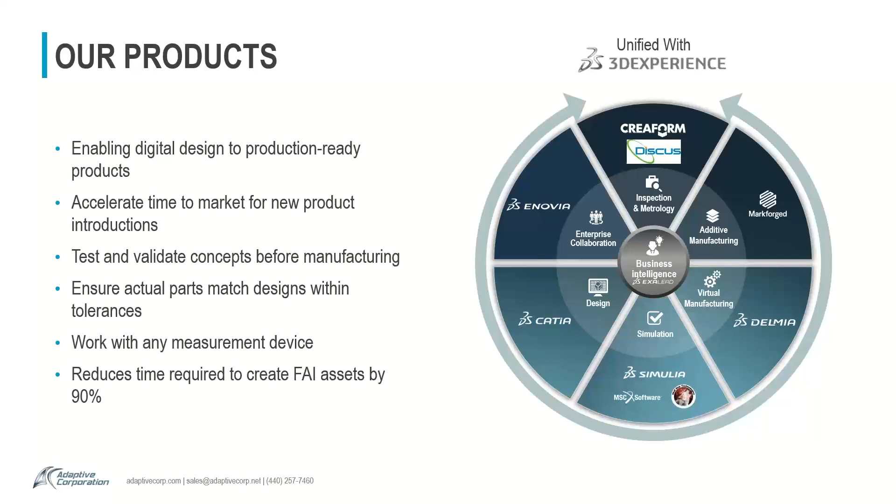So in terms of what that portfolio looks like, here's maybe a little bit different view of it. You'll notice that one of the components that we offer is something called CATIA. For those of you that are familiar with SolidWorks, CATIA is like the big brother version of SolidWorks. CATIA is used largely in the automotive and aerospace industry. And then there's a portfolio around CATIA and now SolidWorks as well for simulation and data management and factory simulation and automation type stuff. And we're involved in that as well.

As far as our customers, I mentioned that we have over 500 customers. Here's the obligatory slide that shows some of our marquee customers and some of the names. You probably recognize a few of those. Our customers, as I mentioned, include some large OEM, Tier 1, Tier 2. We work with a lot of small job shops as well, so it really kind of spans the gamut.

Adaptive specializes in providing portable metrology equipment. So what we're seeing here, these are solutions from a company called Creaform, who makes portable 3D scanners. They also provide portable CMMs, as well as automated or robot scanning and inspection equipment. Adaptive offers connectors between DISCUS and PolyWorks, for those of you familiar with PolyWorks. So it gives us the ability to take the as-measured data and automatically enter it into your PPAP or AS9102. So if you're interested in any of those details, please let us know.

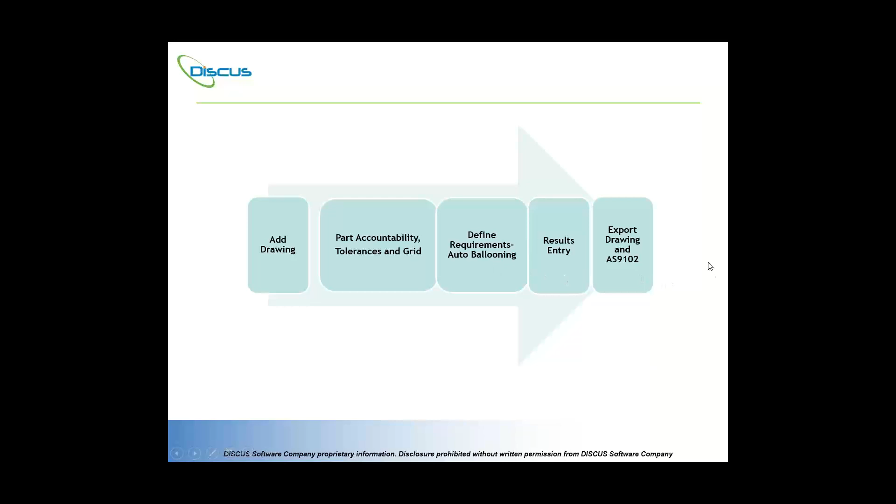So without further ado, we're going to add the drawing, work with part accountability, spend a lot of time on defining requirements, and then export. So let me now get into DISCUS. This is the welcome page.

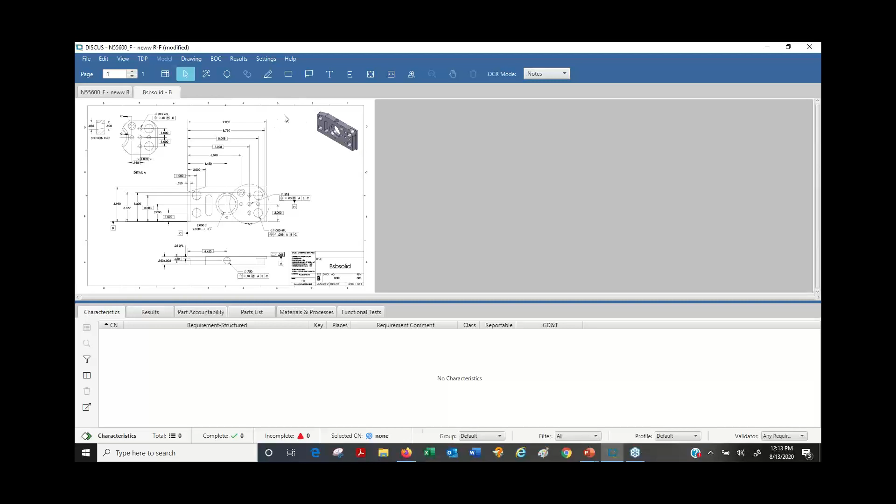Well, I know what you're thinking. I can read your minds. You don't often get prints this nice, I bet. I bet you don't. Well, sometimes you might get a print that has been, I say, a little bit compromised. And let me share with you a print that you'll probably recognize as being maybe scanned one too many times, an older print, very compromised. I know you've seen things like this, right?

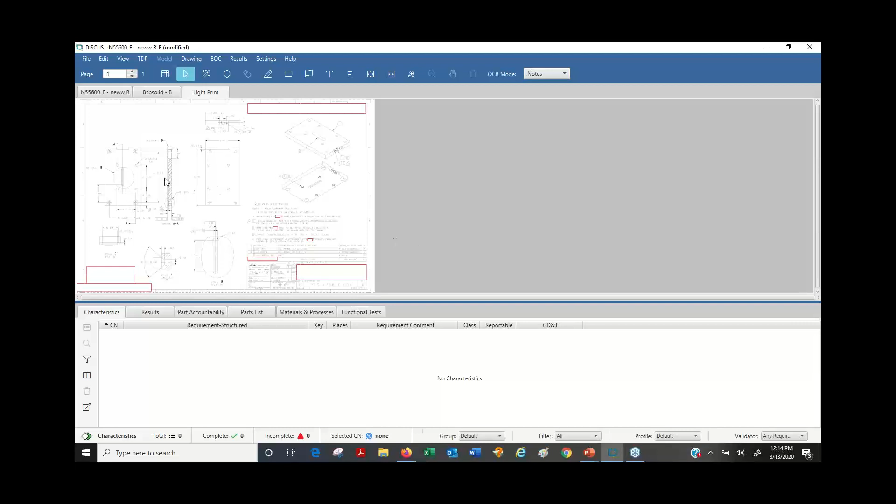Well, in DISCUS, we can improve that for our OCR. Under View, we can adjust the contrast to sharpen that drawing. Isn't that a lot better? Surely helps your eyes, and it facilitates the optical character recognition. Well, I have 3 prints. The File menu, my export will be here. View, you already saw I adjusted the contrast.

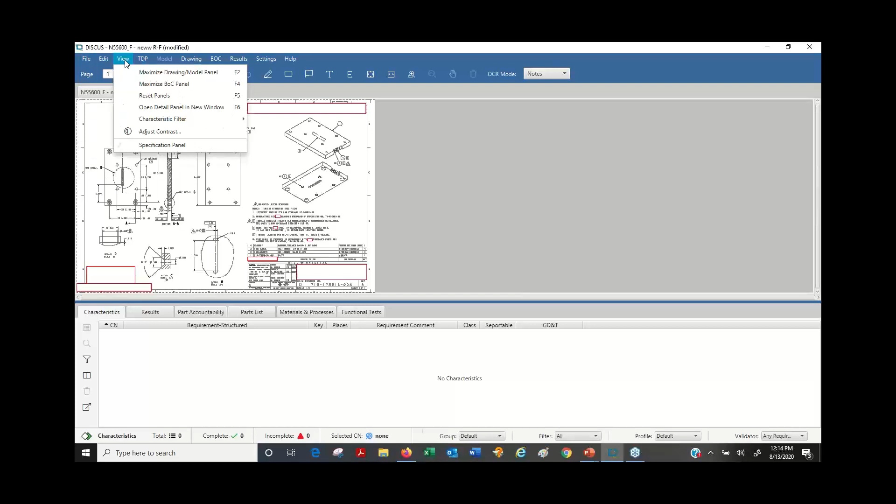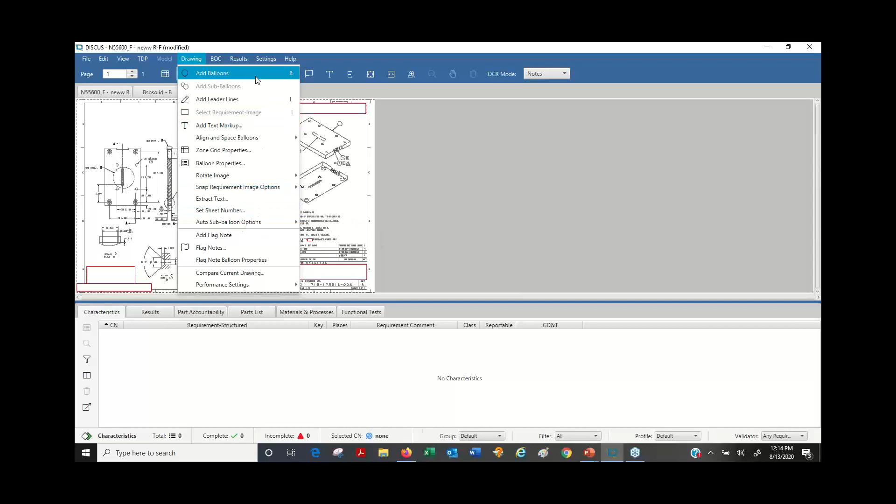And what I do here in drawing, I'm just going to go to some of the more important features, is we have an auto sub-balloon option. The auto sub-balloon option means if there's 4PL or 2X, it gives me that number of sub-balloons. I like to turn that on. Now the results will have our pass-fail data. I set it up and forget it. You can share the list with other people within your group so that you're all picking from the same list.

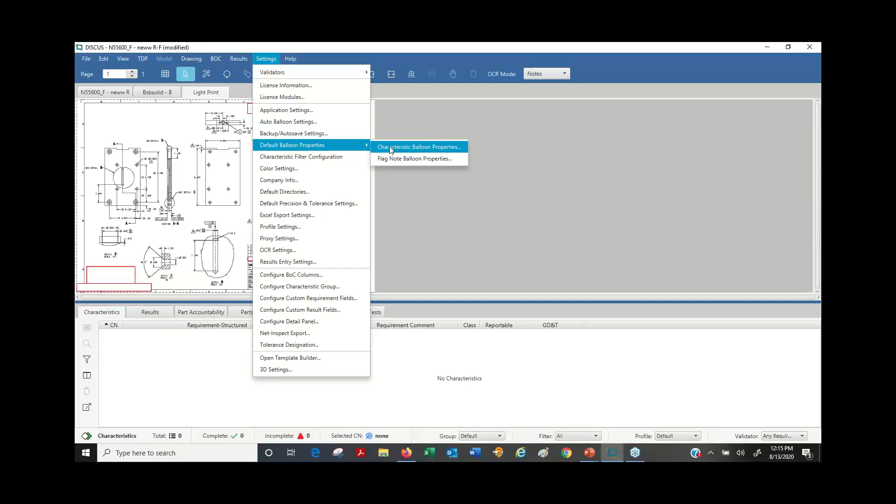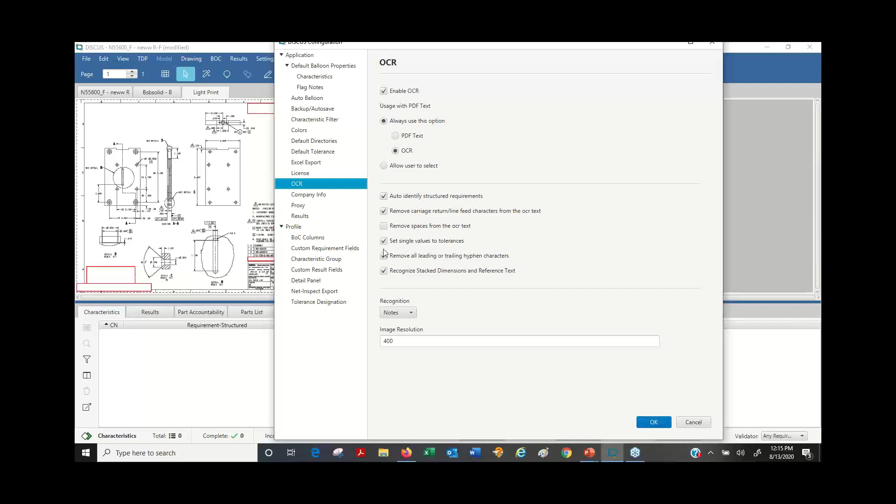Under Settings, we have our properties. So my size of the balloon. Also, I would like to make the balloon nice and thick so we can really show it off today. Additionally, we have default tolerances. I set it up per the drawing. You just click in the cell and change the value per the drawing, because with the OCR, the optical character recognition, one of the toggles is to set the single values to tolerances. You'll see that rather dramatically within this. So that's basically, I set that up and I'm ready to go.

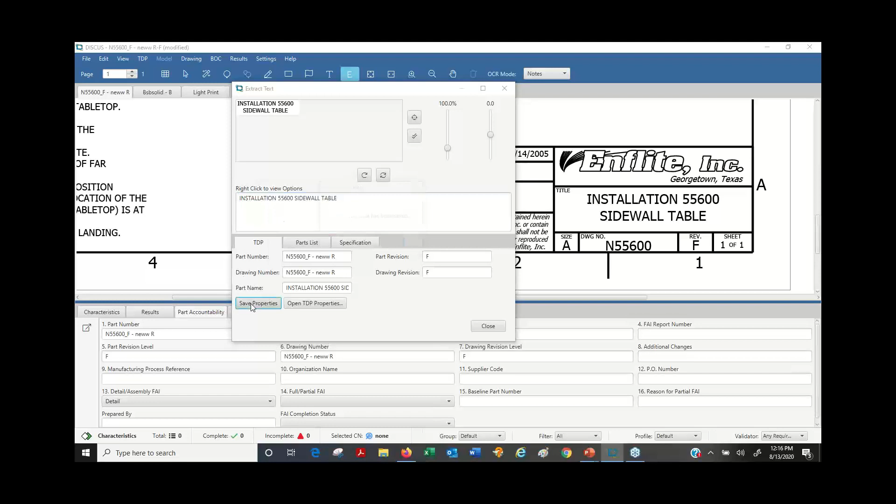I always like to focus on the part accountability first and to show you a little bit of the OCR. This is an extract text. And the reason I like this one is that it can pull from the name of my drawing. I don't even want to type that. This is what OCR does. I drag a rectangle, there it is, and right click, and that's my part name. Save the properties. Okay. And see, it supplied that information.

I'll say that Bill did this in your company, and I'm filling this in right now because this is going to be the title block. You complete this as much as seems reasonable, additional changes, etc. If you have a supplier code, it can be done at any time.

Now, those of you who are aerospace, you know that everything on the left 2 columns are going to be required by the AS9102 Revision B standard. The ones on the right are conditional. Intentionally, I'm going to leave number 9 open so you can see the ramifications when I miss something, because we are very adherent to the AS9102 standard. Those were my tolerances, and I put those in previously.

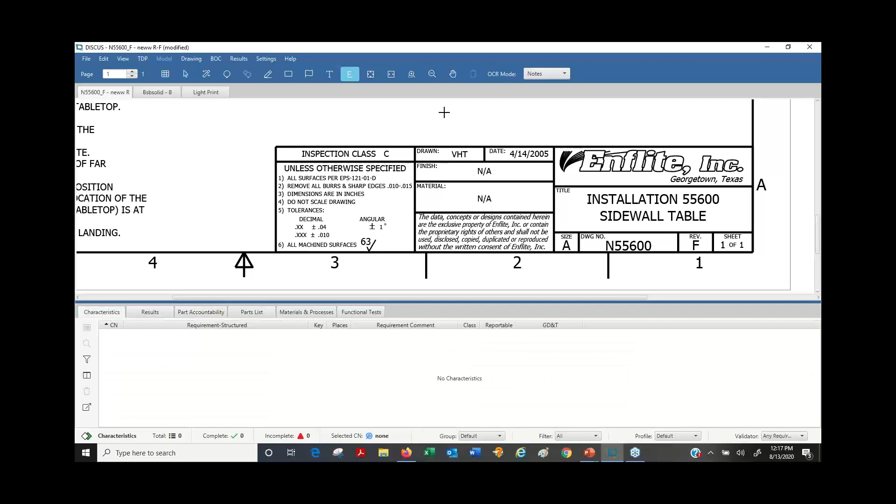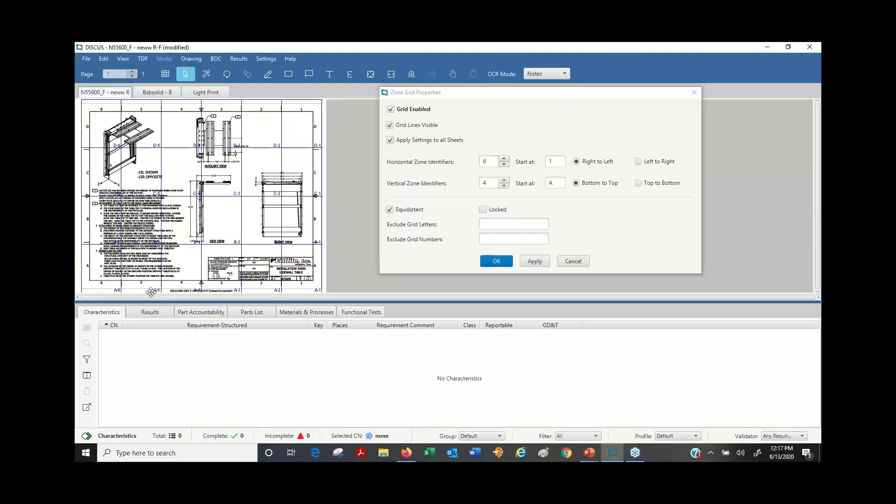What I want to do next, I'm going to put in some zone grids. That has always been a laborious process to ascertain the zone grids. This is 6x4 and click apply. The zone grids are laid. I simply move them. And when I balloon, the zone and grid data is going to be there automatically. I'll move that up a little bit. Looks good. Make them invisible.

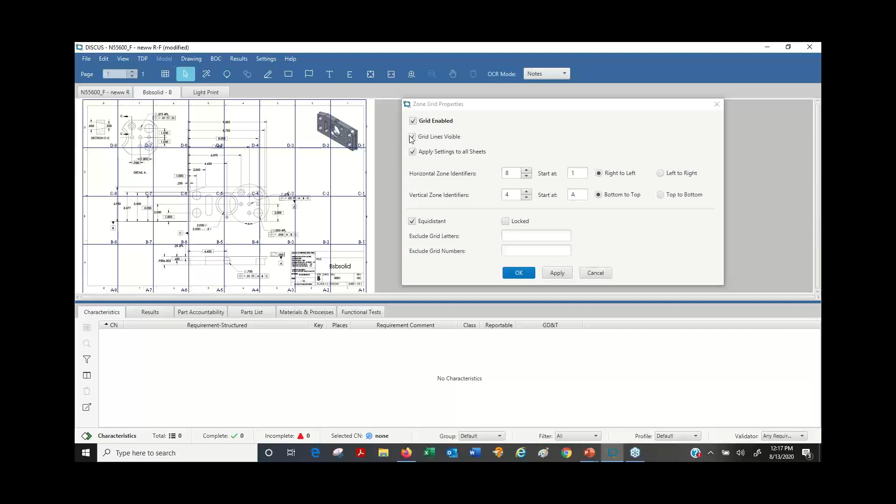Apply. You can apply the grid to multiple pages. Maybe your drawings have several pages. You can apply the grid across all of those pages and click apply. It becomes the same concept. I do all three of them just so that we have the same data as we look at the report later on. And one more, light print. There we go. Enable and 8x4. And apply, invisible, and apply.

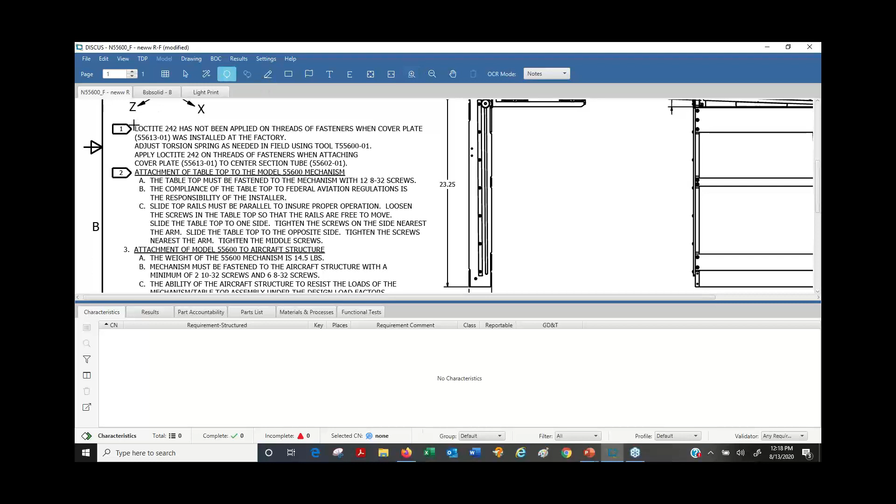So we have our zone grid, we have the title block information captured, and our tolerances. So we're ready to now balloon. Now, I'm going to balloon some notes. With my balloon icon, drag it around the data, and my balloon is red because it doesn't have any data in it, and I made it a nice bold balloon, and I let go.

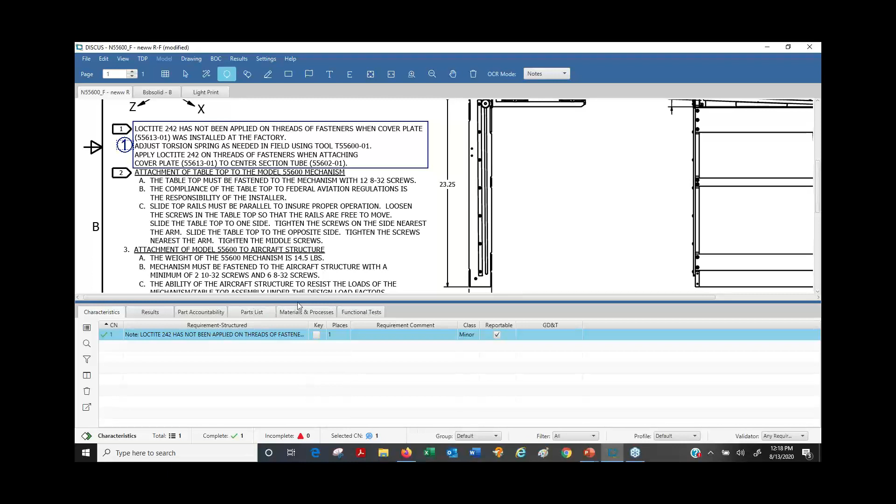And it supplies the information down the bill of characteristics. And you know, specifications are often called out on notes, aren't they? Well, let's assign that specification to Form 2. Let's do it. I'll just put it right here, a Loctite. Right click and add a spec. You can put the name of the spec down here.

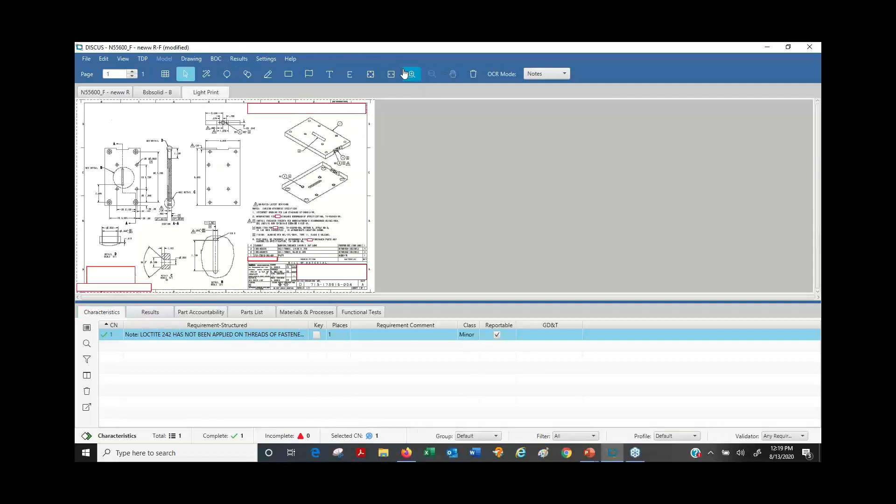I'm just going to be expedient right here. And you can put in your code and all that other information as you see fit. So that is a way to glean the specs right from the notes. Makes sense? I think that's rather important. I'm going to do it again. Whenever I have a training class or a demo, all my students say, boy, I'd like to see that again. So let's do it one more time.

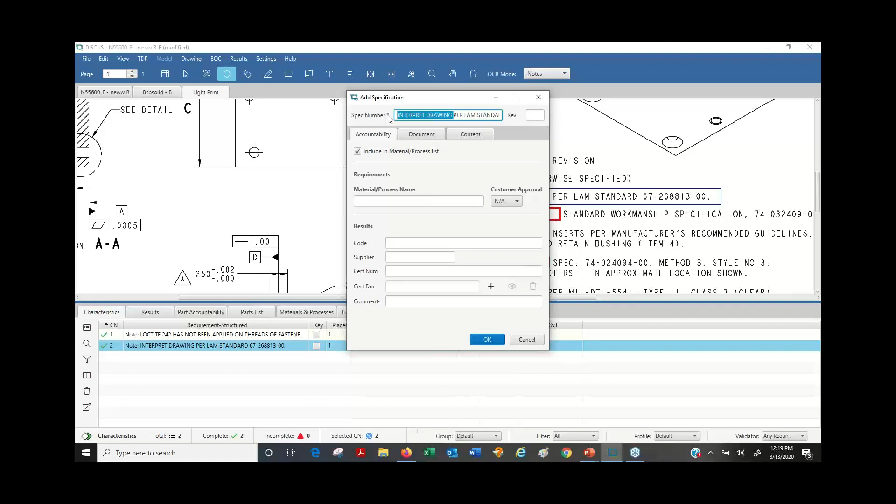Put it on this print. Notice my OCR mode is notes. Here we go. Per LAM standard, highlight, right click. We're already here, and I haven't done any typing, have I? And we are assigning that spec to Form 2. And simply submit it. There you go. So you can continue in that manner.

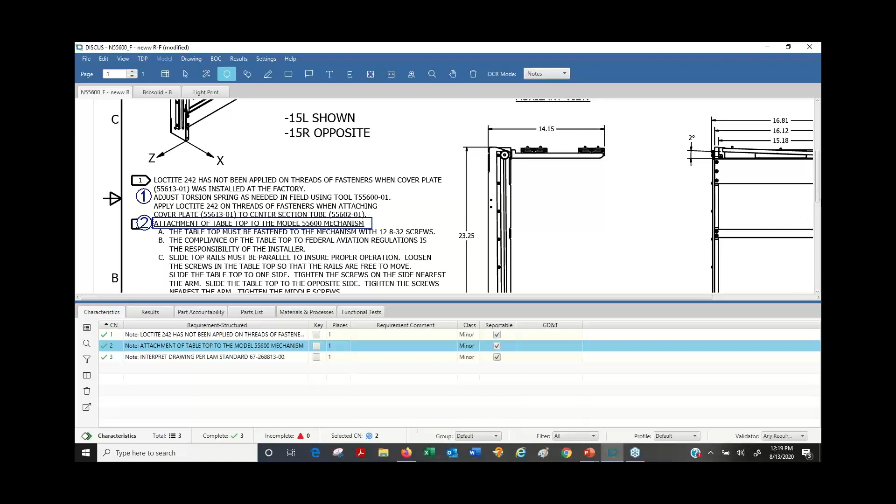Now I'm going to balloon this. Number 2. Let's do a few notes here. Now notice it's number 3, and I don't fancy it being number 3. In the bill of characteristics, I can pull it right up to number 2. Very easy to renumber it. My customer expects that each one of these notes A, B, and C are separate. So with 2 selected, I'm now going to subballoon them.

You know, just this will be a 2.1, 2.2, and you have to ask yourself, if you had to type this, how long would it take? And we are doing pretty well. Perfect. Very good. All right, you can move the balloons, of course, to position them. And, you know, this is another nice feature. You can put a leader line, you know, for really tight spots. You know how that works. And I made my leader line nice and thick as well so we can see it.

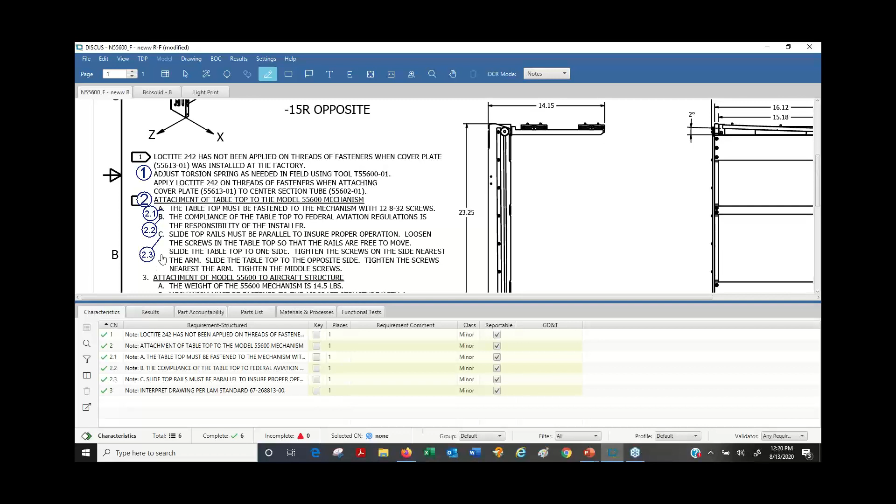Well, fine. Let me move up a little bit. I want to do a little bit more manual ballooning on this one. Just show you some ins and outs. Balloon this. And it gives me the upper and lower tolerances that I set up previously. DISCUS also has some intelligence with it, and for example, this 1.575 will know that it's typical. We continually refine DISCUS so that it becomes a tool to really expedite. One of the things I didn't do is GD&T. There you go. Make sure that's there.

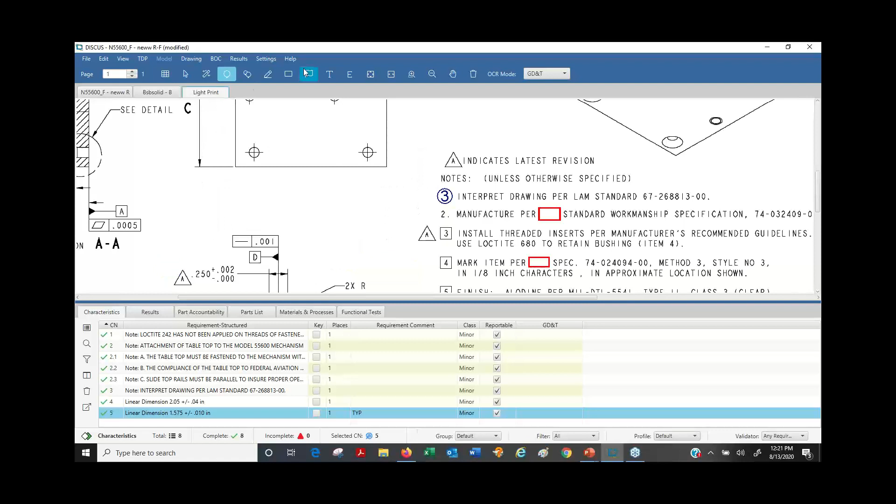All right. We've done a really good job on this, and we haven't had any trouble. But I do want to share with you this drawing because it's an older drawing. I'm going to show you some tricks of the trade here. I'll zoom in. We had to darken this, and actually the font is a little different, and this as well. So I'm going to balloon a few things here, then I'll show you some auto ballooning. I'm going to balloon this flatness because I know sometimes things don't work out real well.

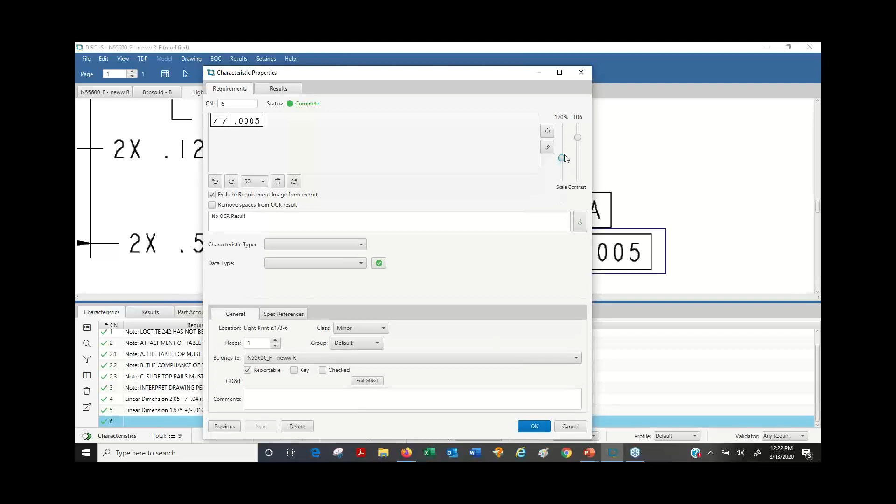Now, in the bill of characteristics, and I had my GD&T going, you may notice there's nothing here. My customers call this the brains of the OCR. It's the characteristic properties. And you see how wee tiny that is. Every drawing is as unique as a person. So sometimes you need to scale it up a little. Let's see if we get it. And maybe, oh, a little bit more maybe. There, that looks pretty good. So I'm going to set that scale and we're good.

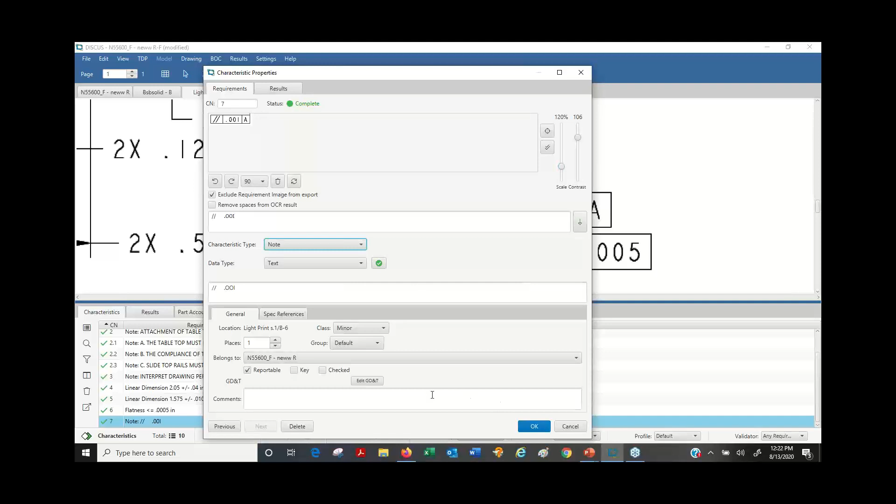Okay. And we'll try it with the parallelism as well and see if I have managed to have the right scale. Sometimes I'm lucky, sometimes not. Sometimes maybe I need to reduce that a little bit and then get the right scale. Let's see. Not quite. There is also a GD&T editor that you can use. And 001. And a 1. And this will be, I think, datum A. Here you go. I do want to keep that.

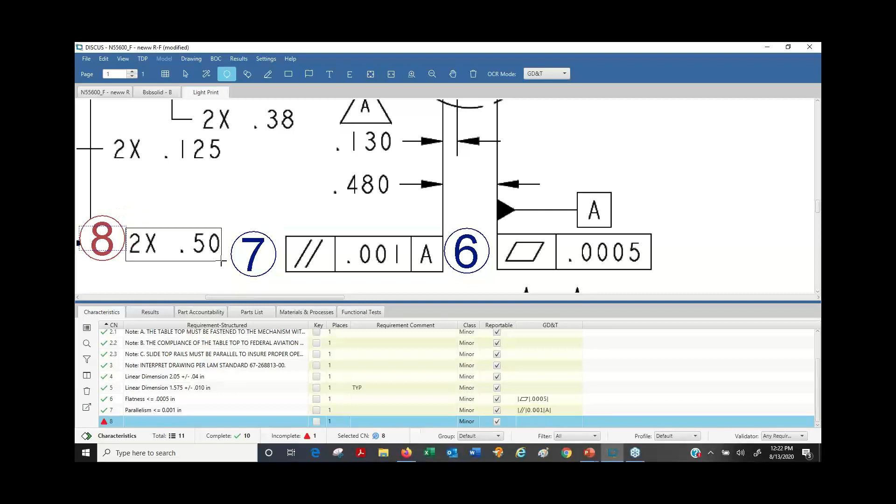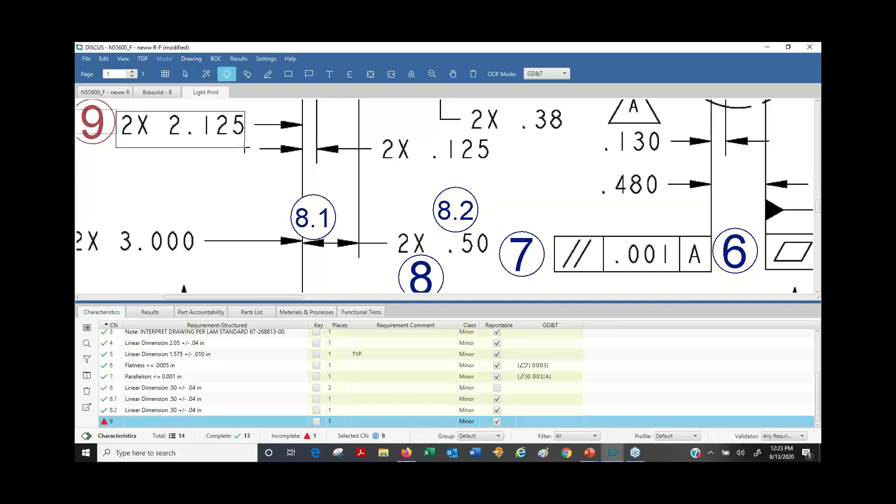Notice when I balloon this feature, it gives me the 2 sub-balloons, 1 and 2. So I can move that. Because it knew it was 2 places, the 8.1 and 8.2 will take the responsibility of the results. So that's a nice feature. Let's see that one more time. You may like that concept or may not. Some of your customers will want you to have that. Others, not so much. So you can turn it on or off. Most of my customers do appreciate having that kind of granularity. There you go. So there we had a little bit of manual ballooning of this.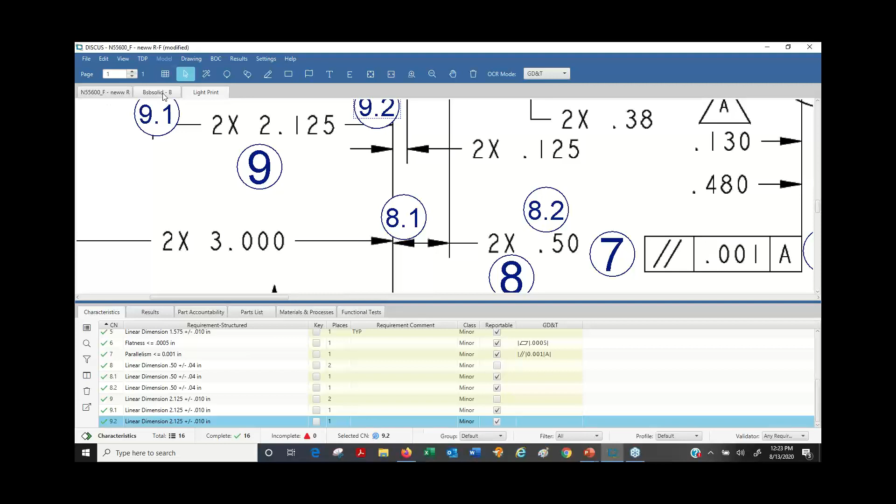Now let's look at auto ballooning.

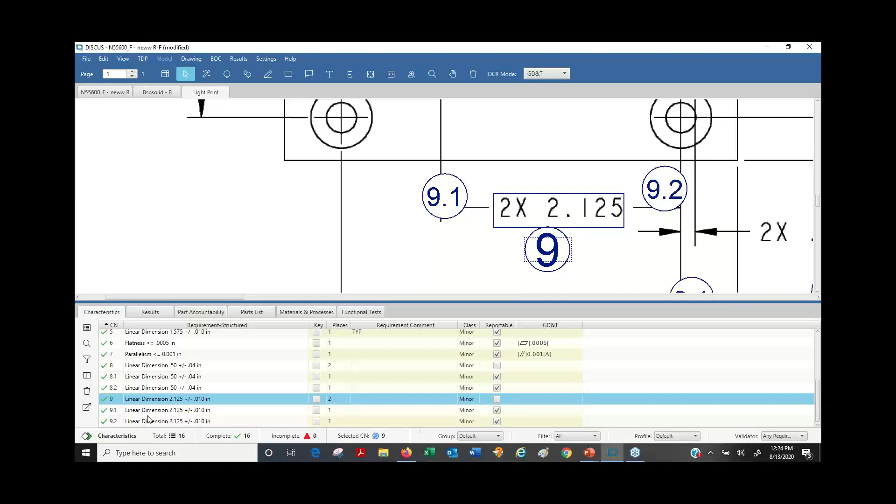Now, auto ballooning will do this for you. It will give you the dimension, put that rectangle around the data, and automatically give you the data in the bill of characteristics. So let's take a look.

This one, that's a real good one for auto ballooning. And you might have certain drawings that have sections that will be ideal for that. So with this, looks kind of like a magic wand, doesn't it? So I'll just grab a swath of this information, just kind of grab that little information, and I'm going to let go. And you don't have time to even get a cup of coffee because it's going to auto balloon the data for us. And there it goes, and ran the data.

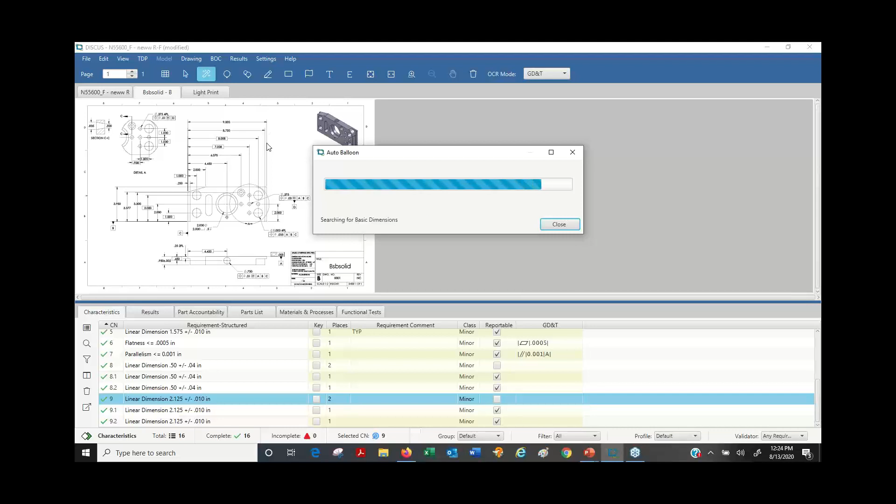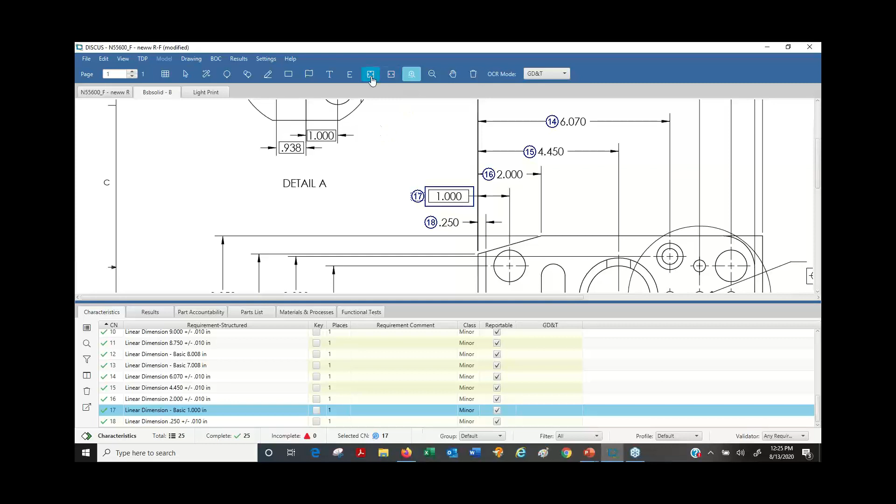Very good. Now let's zoom in and take a look at what we have here. And number 10. Look, 10. There we go. Linear basic. We've done a pretty good job throughout all this. Linear basic. It knew that. Now, it knew it was a basic because of this line underneath, which gives me explanation for you that sometimes features such as this, we have the diameter right on top of that. You might think this is a basic because it sees that line's been programmed that way.

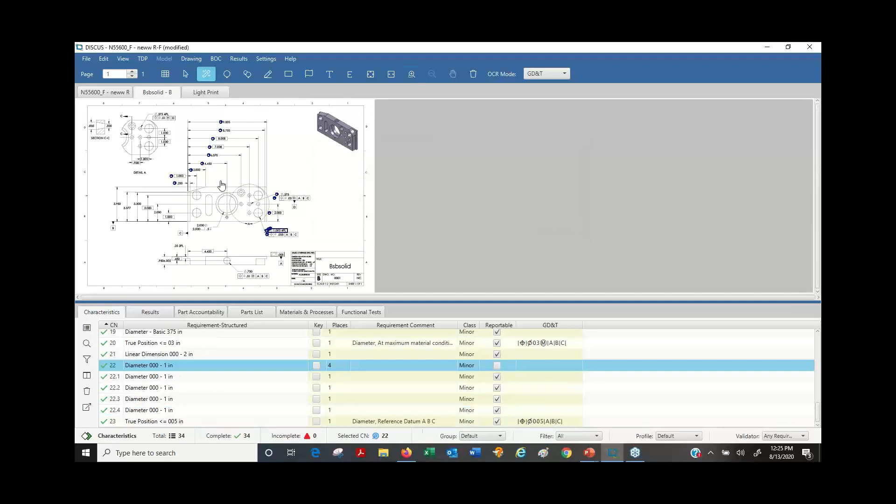I'm going to balloon this little swath here just to show you that. But it's easy to fix it. All right, let's go. And I'll zoom in and take a look. Look at 19. Thought it was a basic because of that pesky line. Now let's increase the scale a little bit, see if it behaves. And you can crop out that line just very easily. There, reevaluates and you're ready. And there's the true position, diameter, maximum material condition, reference A, B, and C. Did that automatically.

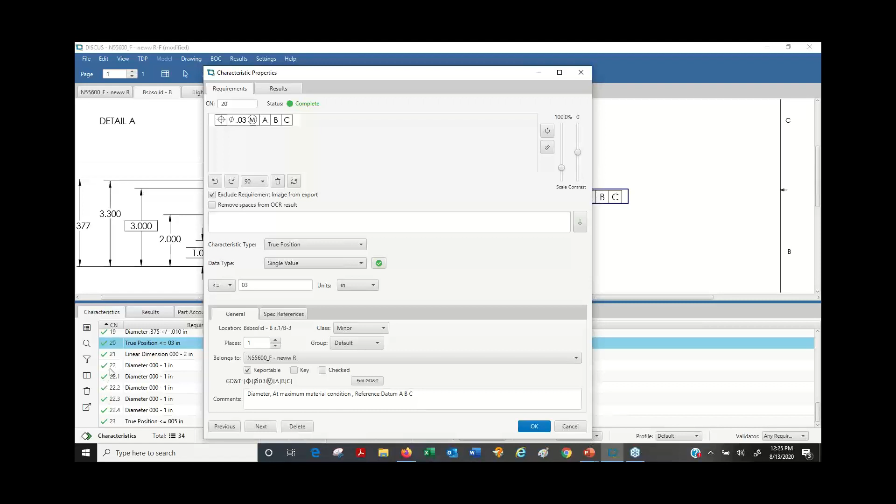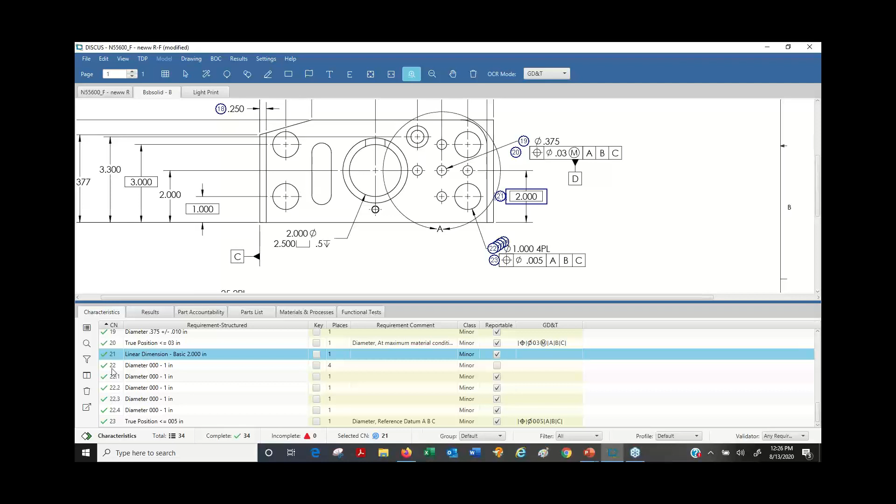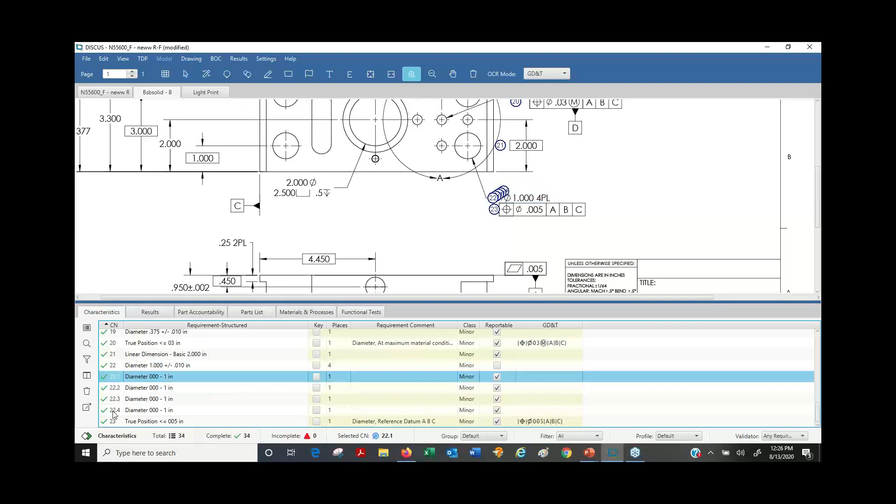And we have 21. Okay, let's see, that's that. Okay, there we go. If you have a little arrow there, you can just change it. I change it down here. You always want to keep eyes out for it. Okay. And there we go. And let's look at 22. 22, as predicted, is that line there. And I can, there it is. I kind of clean that up, saw a little bit more, and you can convert it, and we're good to go. The children elements, oh, okay. I love the copy paste feature. If you do like this, those 1, 2, and 3, DISCUS does know places, PL, and X. Very quickly, you can get through a lot of the data rather quickly.

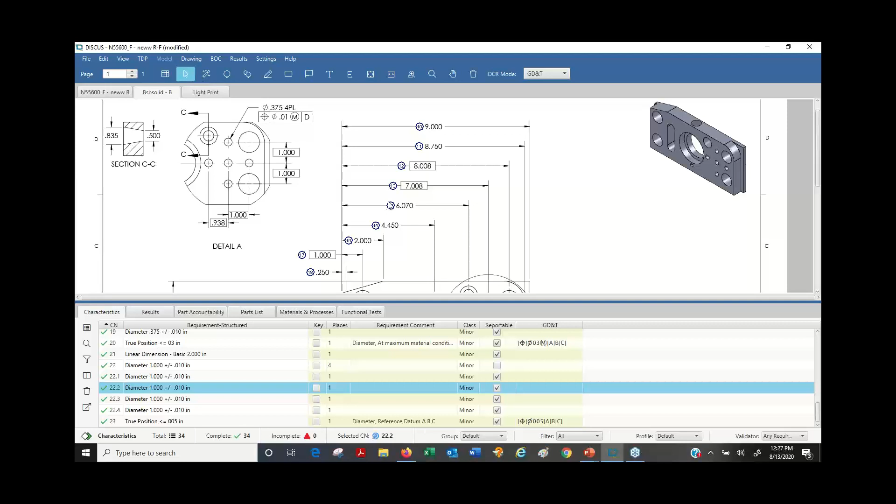There you go. Now, I have this question for you, and you can just answer in your own mind. Have you ever ballooned a print and found at the end that you may have missed a characteristic? If that's happened to you, rest assured this doesn't have to happen to you ever again. Now I'm going to delete something and show you this. Now it's true. We would not probably miss a single characteristic on this drawing. But if you have had those drawings with hundreds of characteristics, it's just very possible that you may have missed one. So how about a little insurance policy? I'm going to show you what to do. Let's zoom in a little bit.

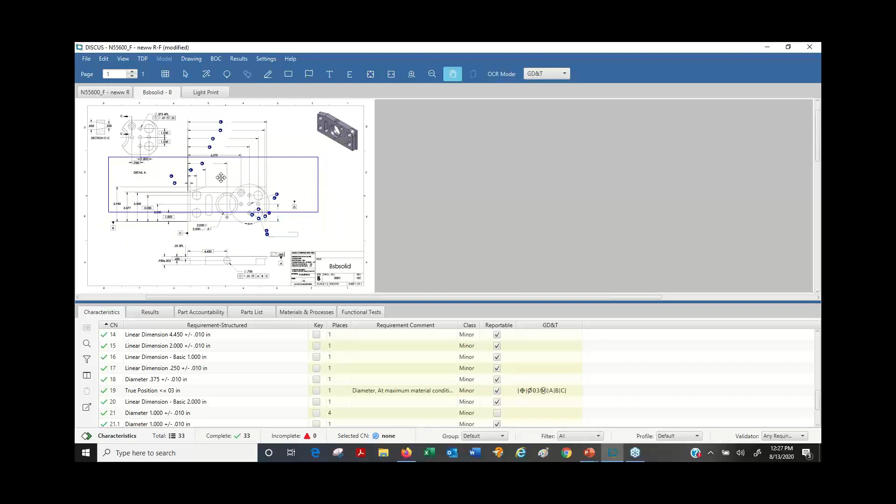If you press Control W on the keyboard, then you can go on a reconnaissance mission to see what you missed in the print. Maybe you missed it because you meant to. Maybe it was a reference dimension and you don't have to deal with that. Or maybe you bona fide missed a characteristic. That is Control W. Whenever I balloon, before I am ever ready to send this off, I always perform this little task, Control W, to see what I missed.

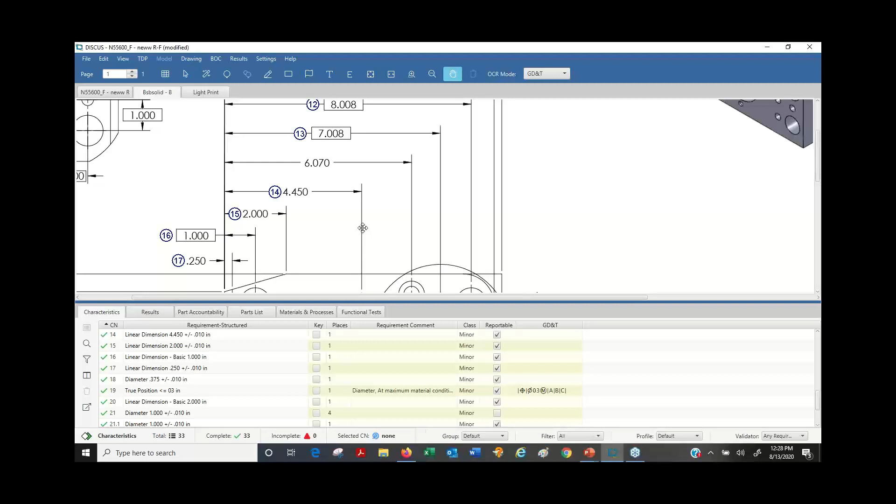I will balloon this one. Let's go ahead and drag a rectangle in, and notice it's numbered number 23. Well, I could pull it up into the 14th slot, or you could right here in the characteristic properties, once again, just change the numeric value to 14. And OK. And you're back in business. Make sense? Very good.

Well, I'm now going to conclude with a couple things. I'm going to export the balloon print and show you a fast and easy way to get the result data. Results can be right here. You could do it right into DISCUS, or maybe you have an inspection team and you don't want to share your license with them. You would like to keep your license for yourself and they could work in Excel. That sounds like a good idea. So we could do this.

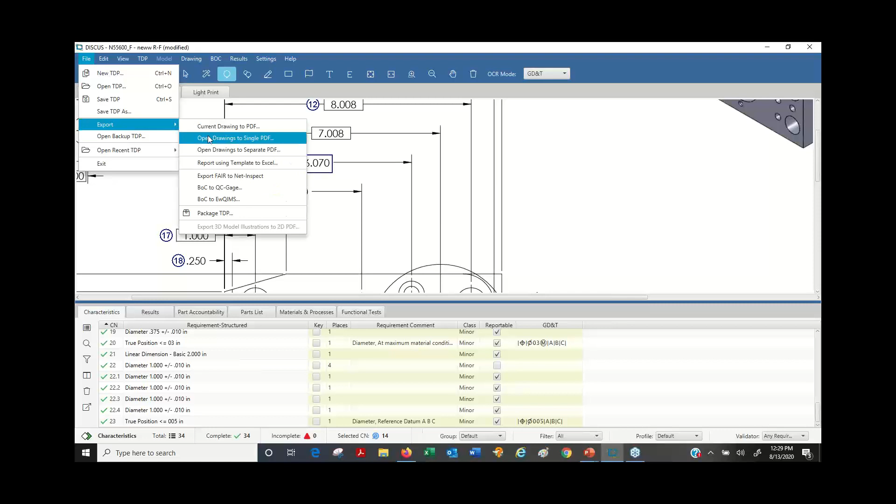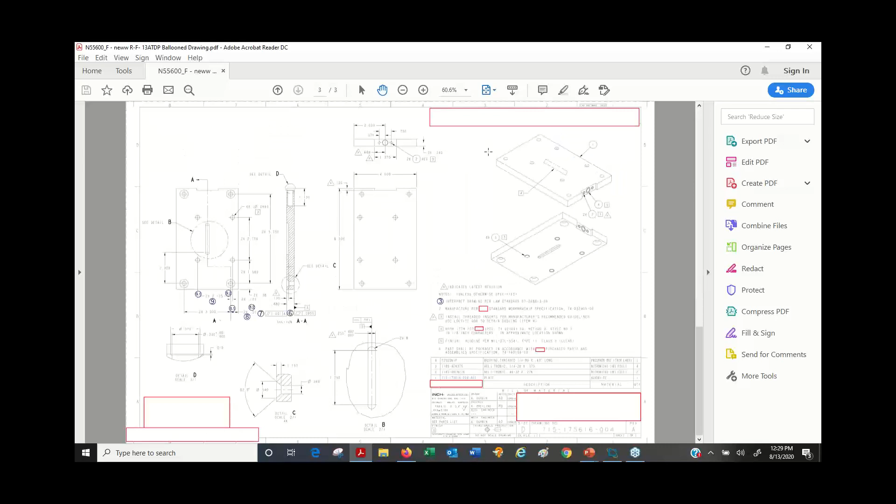Let's export the prints. I've done 3 of them, so we'll just knit them as a single PDF. And today's 13 August, and I'll just name it that. There you go. And save and open, and gives me those prints. The balloon version of what we've done. That, a little bit of this one, and then this. Second one, I did auto ballooning.

Very good. You may want to send that print to your inspection team, put it on the network so they can get it. And then you can do this for your team. You continue working, but you could set up an Excel just for them to enter the results. You don't have to share your license with them.

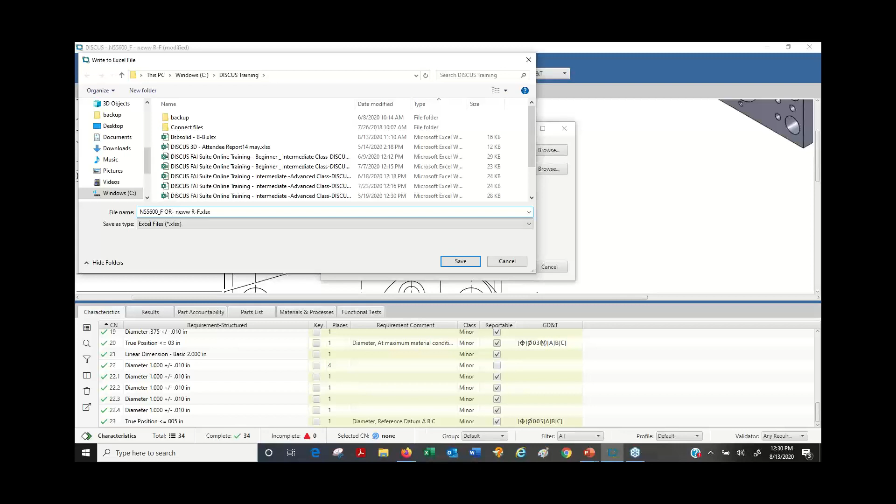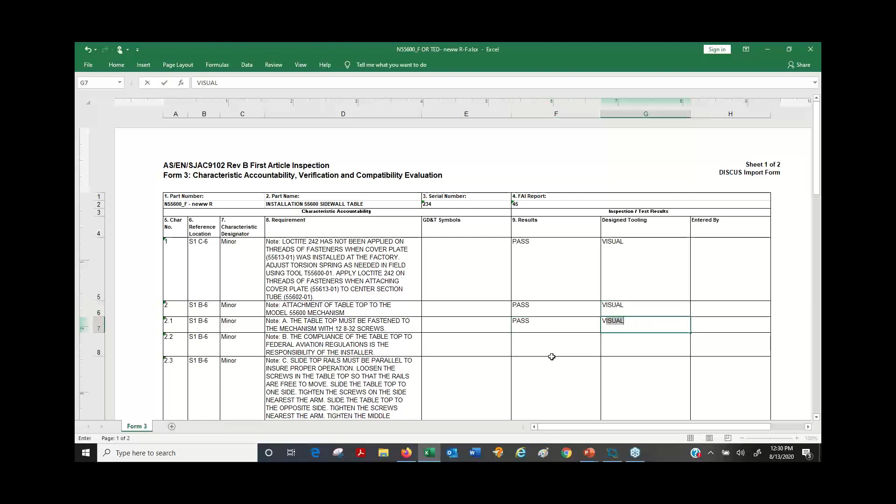And let's say this is for Ted. Ted is our inspector for today. And click Save and Export. And this is given to Ted, and he's outside of DISCUS. He has Excel. He doesn't have to have any of the program at all, and he has the balloon print, and he has the power of Excel to get through this. And pass. And I'm just going to be expedient, put some things in there, and he just put P, and in the power of Excel he continues throughout this process.

Now, let's say just for a minute, poor Ted had a bad night. And I feel quite sad for him, but he had some problems. And he accidentally, over here, made that a, I don't know what happened. He just kind of made a mistake. Not that that would ever happen. Change the value. 1.575 in calipers.

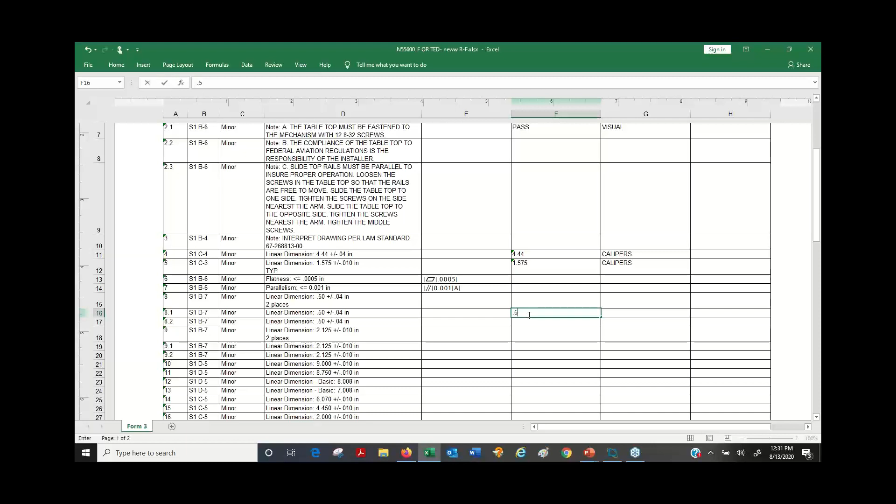And then we'll go down here. I'm just going to kind of nitpick this one and be 0.5 calipers. I'm going to just kind of do a few here and there. And 0.54. I'll say calipers again. Okay, let's pretend he's done.

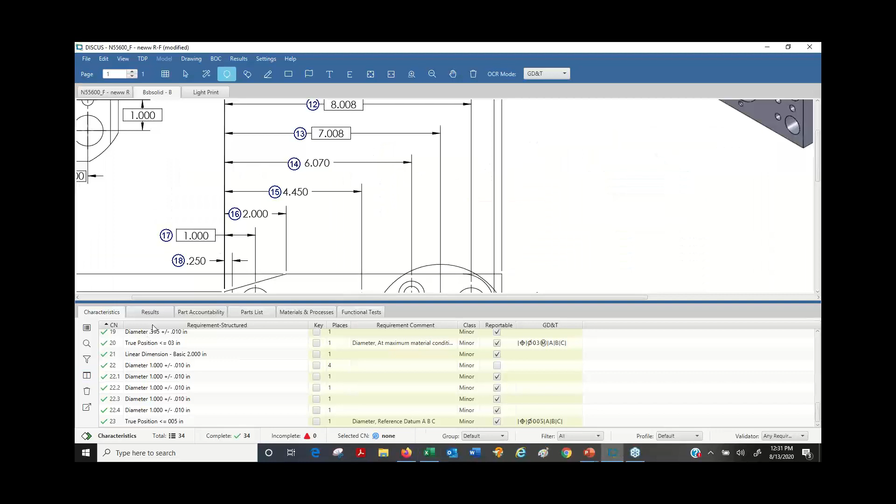File. Oh, I want to go back. I want to file and I want to save. And we'll just put it here. He'd probably want to put it on the network where he could get that very quickly. And we'll say Ted results, and send to my DISCUS training. Very good. All right. Now, that's from Ted. Gives it to you. You didn't have to use your license.

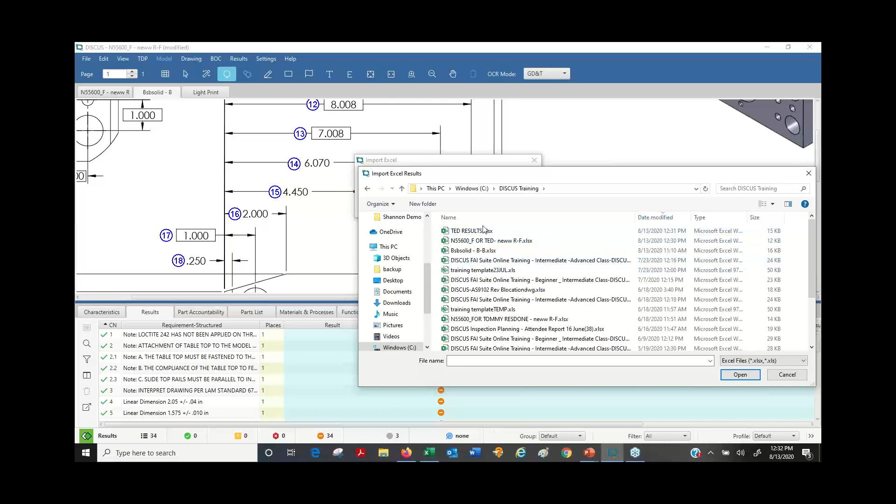Under Results, Import from Excel. Browse. Let's find out where they are. It's in DISCUS training, I believe. All right, let's find it. Ted results, there they are. Import them from Ted. Grand, there you go. Now, do you remember Ted had a bad day and he actually changed the requirement here? But DISCUS held firm. DISCUS had locked down all the characteristics, and you'll have a conversation with Ted right here.

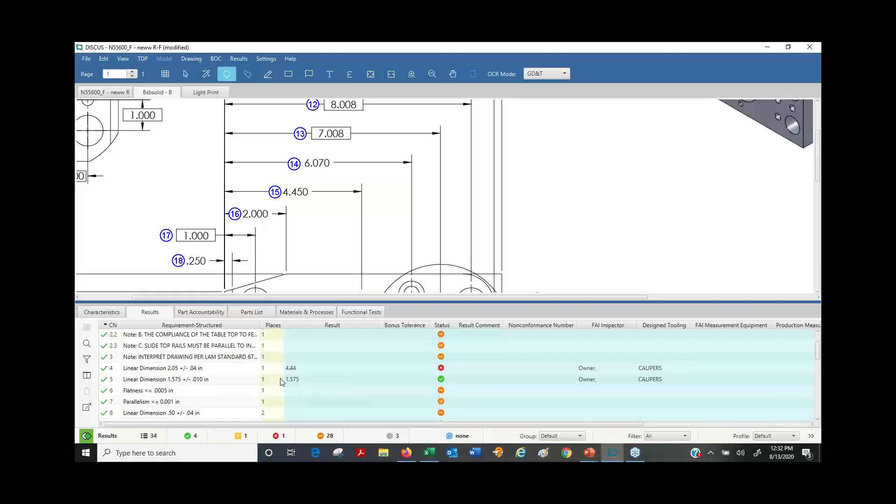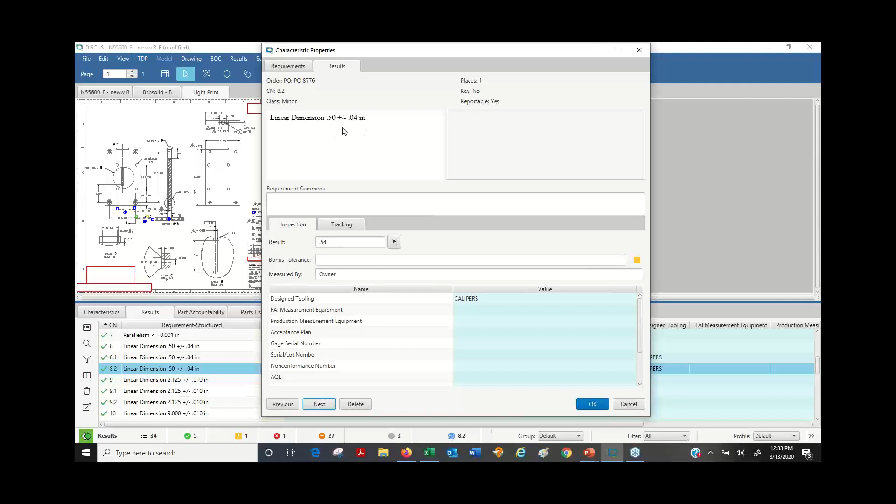Also, let's look a little bit further. This characteristic failed. And sometimes my customers say, well, I don't understand why that failed. Well, DISCUS tells you. The value of the result's not the same as the requirement. Ted didn't go out enough decimals. You can be more precise in AS9102, not less. He needed to go out. He needed to meet that requirement. This turns yellow because it's very close to out of tolerance. You can turn those warnings on or off, but they're always good to know.

Well, we have the balloon print. Let's export. Under File, Export. Now, those of you who need to export to NetInspect, we have a direct link. We've had it since 2007 with them, and you can export to NetInspect. So if that's one of your customer requirements, you can go right from DISCUS and upload the balloon print and all the data into NetInspect.

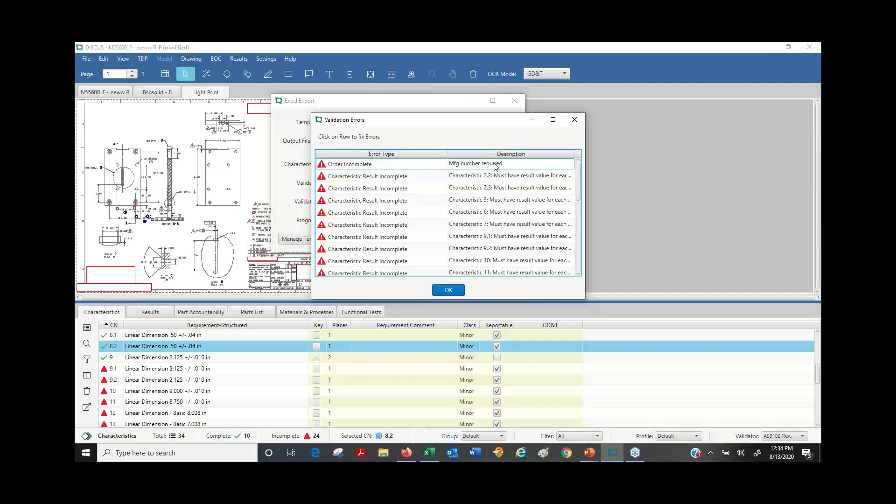Well, let's do this. Do you remember at the beginning, I said there was a validator? Let's see what's required by AS9102. We missed these results, which I understand. And that manufacturing process reference number that I intentionally skipped has prompted me. That is true. In the part accountability, I left out that job number. It's an internal number. And this is again required by AS9102. So let's do it again.

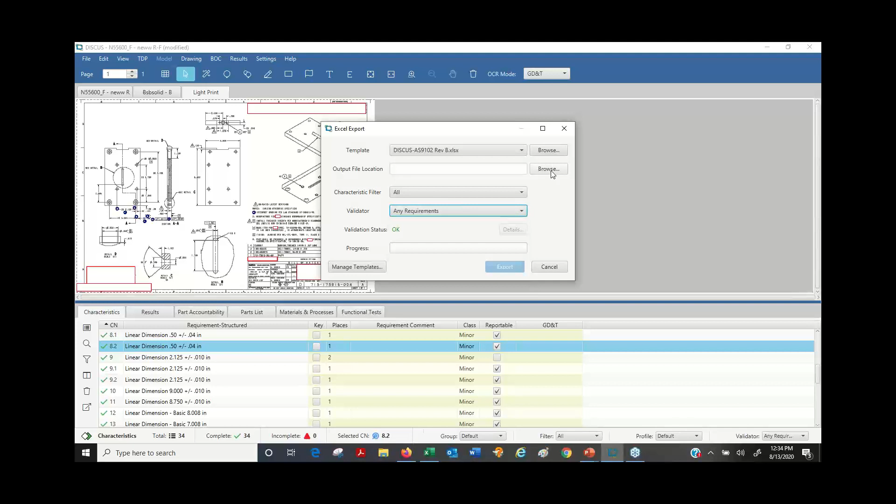File, Export, Template to Excel. This time I'll say any requirements. I know I didn't finish the results. And I'll click Browse, and I'll call it Final. There you go. And save and export. Open. There we go. This is what Ted had done, remember? And here's the AS9102 form.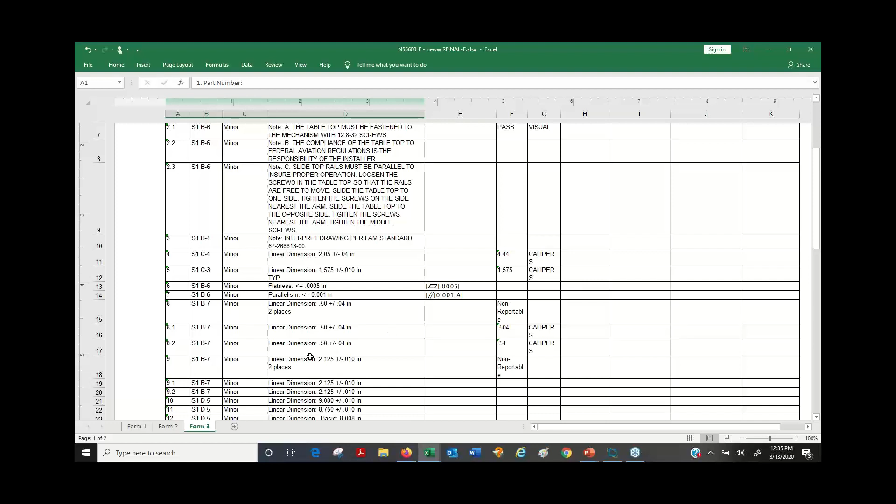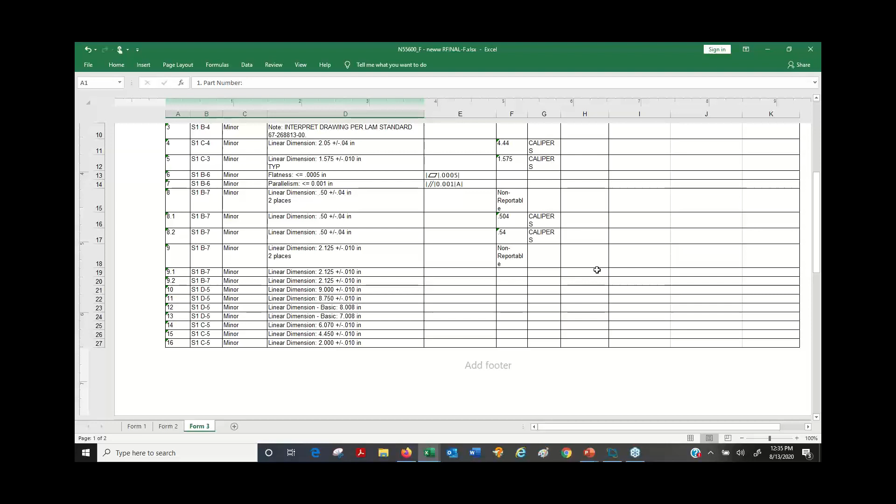This is the data. And if you have, again, your own template, we can create it for you. Maybe you like it with your own logo and maybe parsed out a little bit differently. We can do that for you. And let's see, we had from characteristic 10 through 23 were auto ballooned.

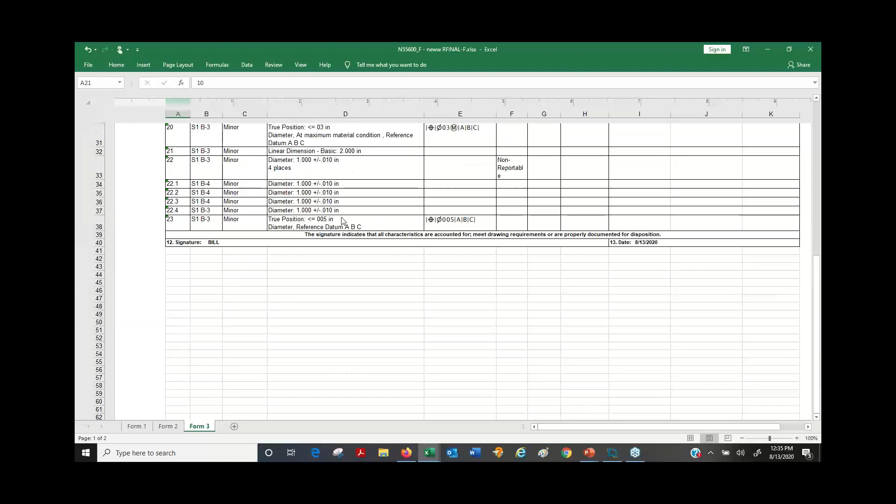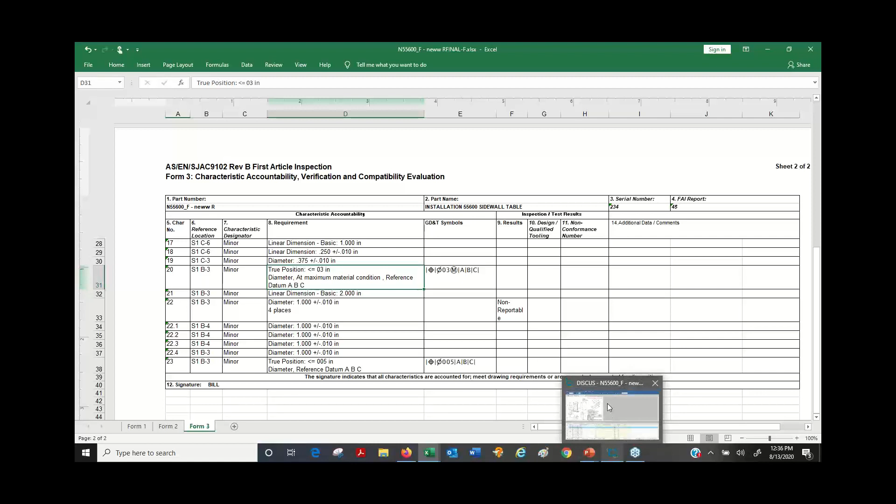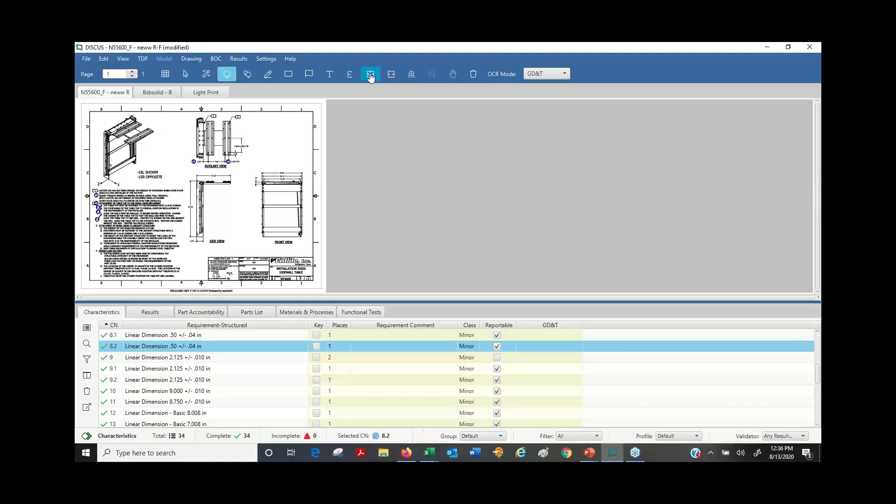Reference datum A, B, and C, and gave me my GD&T callouts. So this is DISCUS Desktop with the optical character recognition and results. What you've just seen comprises what we call the first article inspection suite. So if this is something of interest to you, if you think it can save you time, effort, error proofing, then this might be an excellent solution for you.